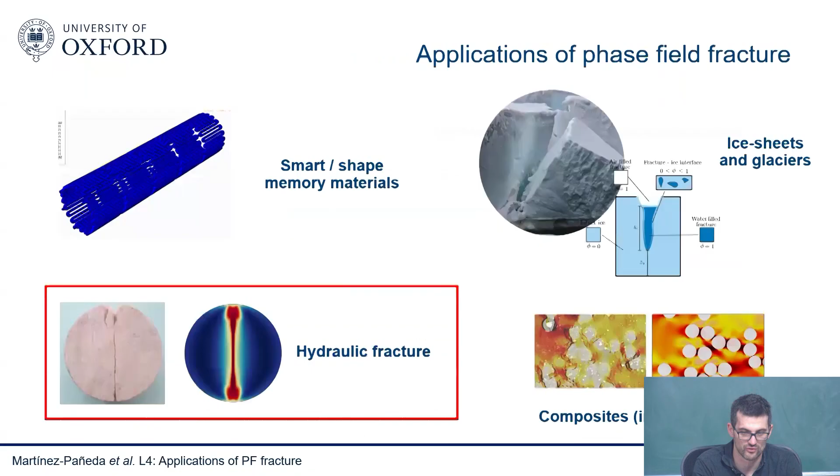We'll discuss some hydrogen today as well. I will expand a bit more on some of the things that we discussed yesterday, and we'll also discuss a little bit fatigue as well. But before that, let me take it where we left it and go back to those carbon nanotube composites. So this was yesterday, and we didn't finish. We left it just about here. So we saw the fiber reinforced composites, and finally carbon nanotube composites. So this is the last item of application of phase field to composites.

The motivation for us, at least, I mean, there's a lot of people working on carbon nanotube composites. These are sort of smart materials. Carbon nanotubes have some interesting properties. The motivation for us was to use them as sensors. So this was more a civil engineering type of application. So the idea is to either embed those carbon nanotubes into concrete or create some composites that will act as some sort of smart skins. So there's an idea of monitoring structures for damage.

This is often complicated and done at a global level, but often a lot of the problems that we have in structures are local, like corrosion and so on. So we want to put those skins somewhere where they tell us some sort of local damage has occurred. And the challenge from a scientific point of view is more that those nanotubes are very small, as the name suggests. They normally have a very large aspect ratio, and they're difficult to incorporate in the continuum, right? How do you handle those tiny nanometer tubes at the continuum level?

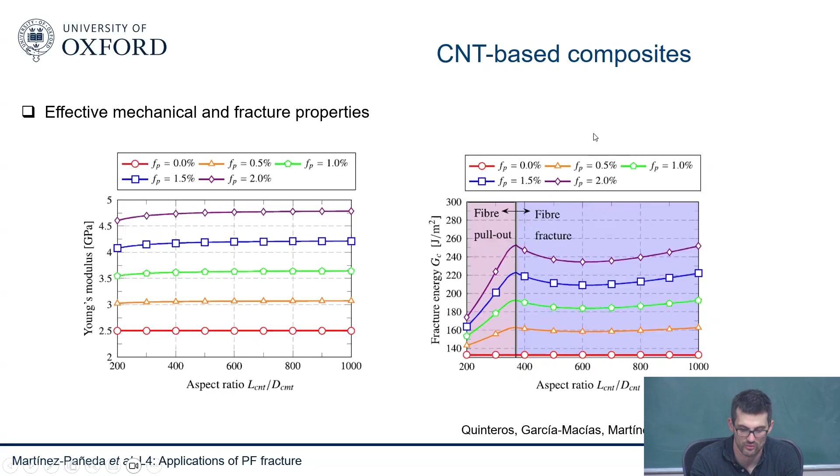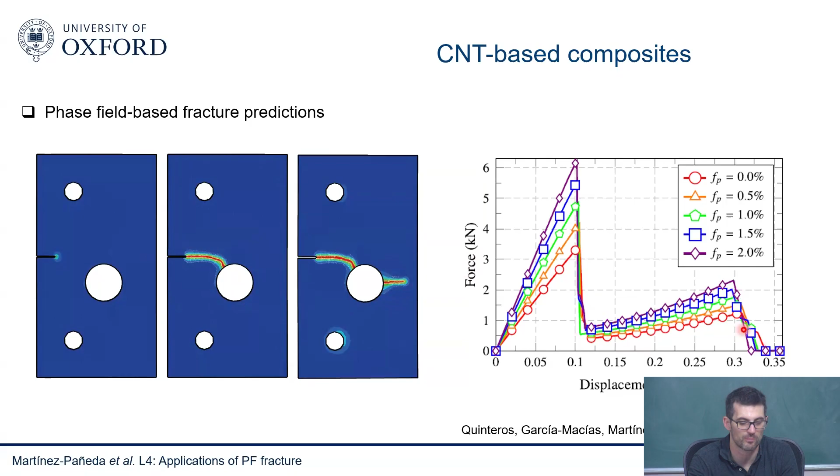So then you see cracking initiating here. Again, the phase field can predict the nucleation of cracks. So we can see a new crack nucleating here, and then eventually the complete failure of the component. And you can see that the whole package can be captured without convergence issues.

But of course, as I said, what we were motivated on was capturing this sort of multi-physics, smart material type of behavior. So we wanted to develop a piezoresistive electromechanical model. Here we need to account for both the degradation of the stiffness and electrical conductivity. And this is something that we discussed the other day.

So I think actually there was a question about if you need to come up with your own degradation function, what you need to do. So this is the degradation function, normally called G, that we use for the phase field. So normally we use this quadratic form. Every degradation function has to be equal to 0 when the phase field is equal to 1. It has to be equal to 1 when the phase field is equal to 0, and then the derivative has to be negative when the phase field is between 0 and 1.

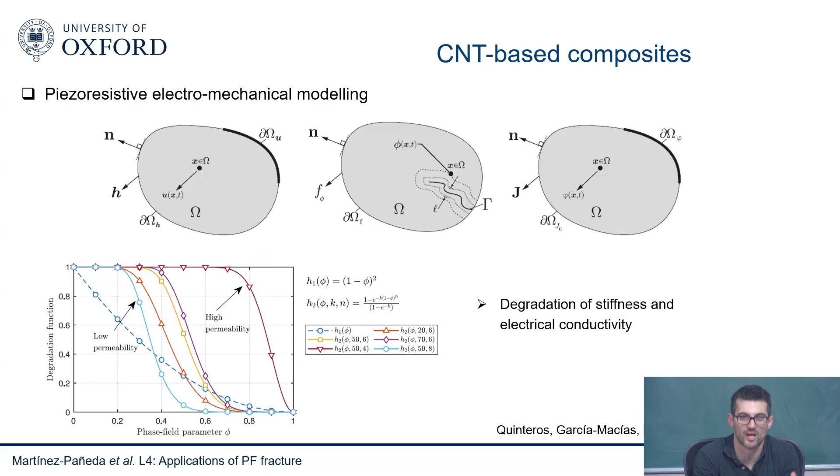So basically there's some conditions on your degradation function, but we initially decided, okay, why add extra parameters, right? We could use the same degradation function for the electrical conductivity and for the stiffness. And we saw that this was not okay in the sense that we were not able to reproduce the experiments. So this is the H1 here. We needed to do a much more abrupt reduction in electrical conductivity in order to capture the experiments. It's difficult to know exactly from first principles what's happening physically, but in order to fit the experiments we had to do that.

And you can see some examples here. This is a piezoresistive electromechanical modeling. So again, we're solving for an electric field in addition to the deformation and the phase field. And I'm not telling a lot of details about that now because I'm going to have a dedicated lecture on multiphysics phase field modeling. But the idea, you have a uniaxial tension test where you apply an electric potential.

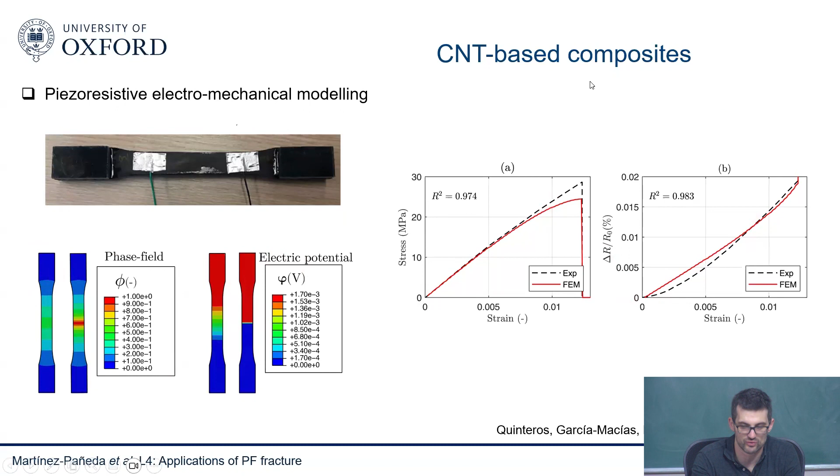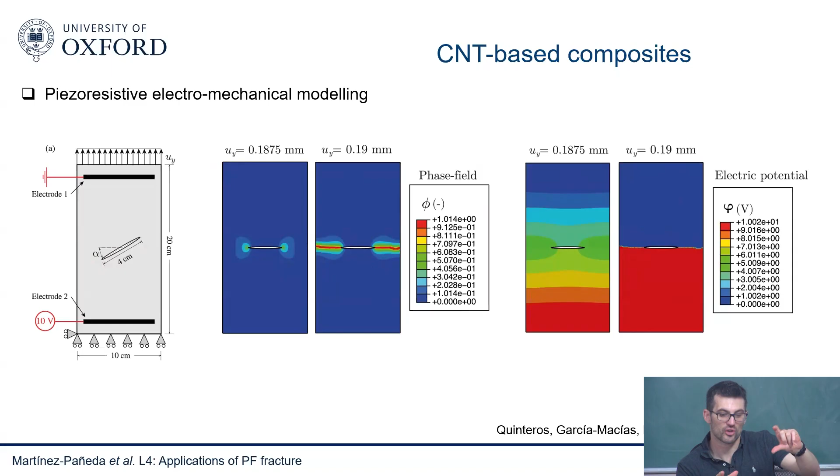Then we also tried other boundary value problems. So this is a plate with a crack that we rotated in multiple directions and tried to see, again, the same trends, right? Basically, when you have a crack, you lose completely this conductivity. There's a discontinuity in the electric potential. And this is what we wanted to see because our idea was to use this kind of piezoresistive smart skins that will tell us when a crack has grown by changes in this electric potential. This is what the engineer will measure.

And we can also do it in 2D, 3D. So this was a 3D example where you have multiple defects to start with. So it reminds me a little bit of the pipeline that we saw yesterday. So some defects to start with, you have an applied potential here, and you see how the electrical conductivity goes.

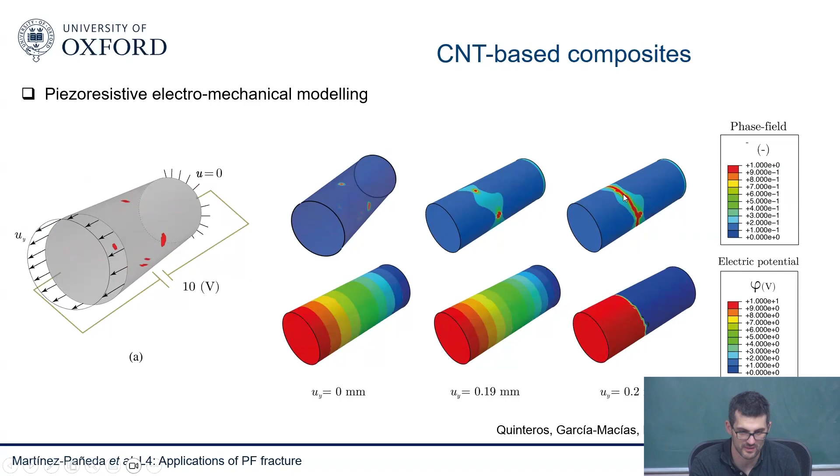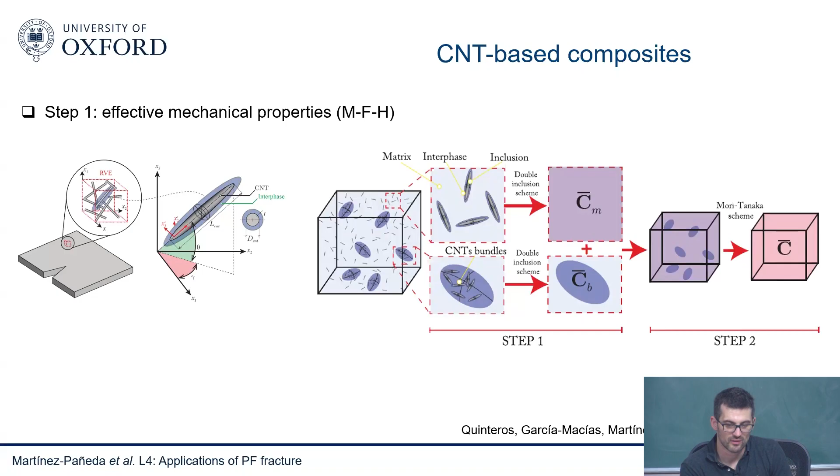But then eventually those defects merge with each other, and then you see the discontinuity in electric potential. That's basically the idea. This is something that is very much ongoing work, but this is the last part of the carbon nanotubes. So here what we did is a two-step process where first we do some mean field homogenization, and then based on the carbon nanotube dimensions, so the aspect ratio and their orientation and their volume fraction, we determine what are the elastic properties and the fracture properties. So it's a pre-processing step.

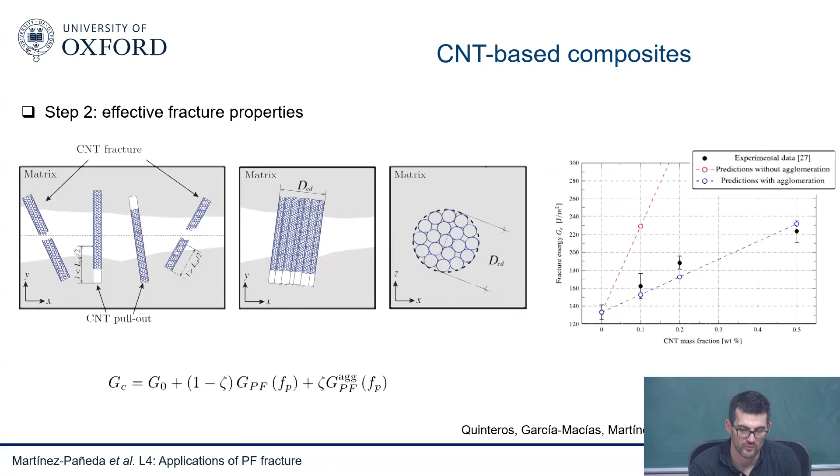Then with this homogenized model in the continuum, we run our finite elements with the phase field fracture and with electrical field on occasion. The idea was now, okay, is this mean field homogenization model perfect? It does work okay, but we can see that for certain conditions we're not able to capture what we see in the experiments. So we were hoping to do a model where we have an RVE, where we actually resolve those carbon nanotubes. So basically try to enrich that mean field homogenization scheme.

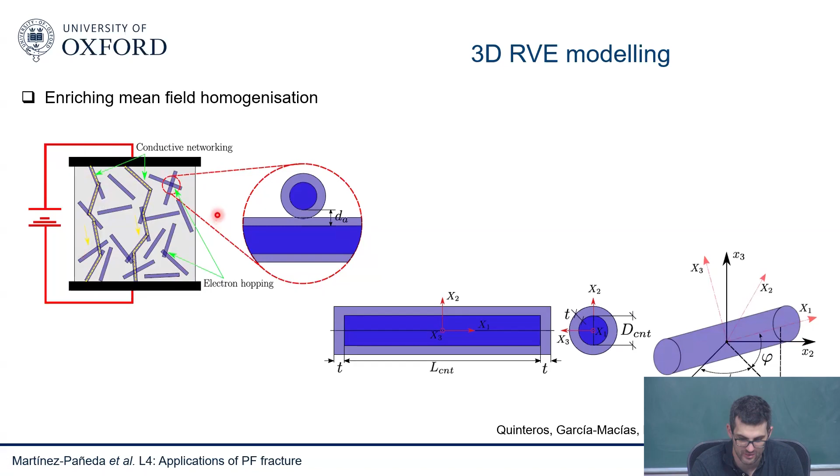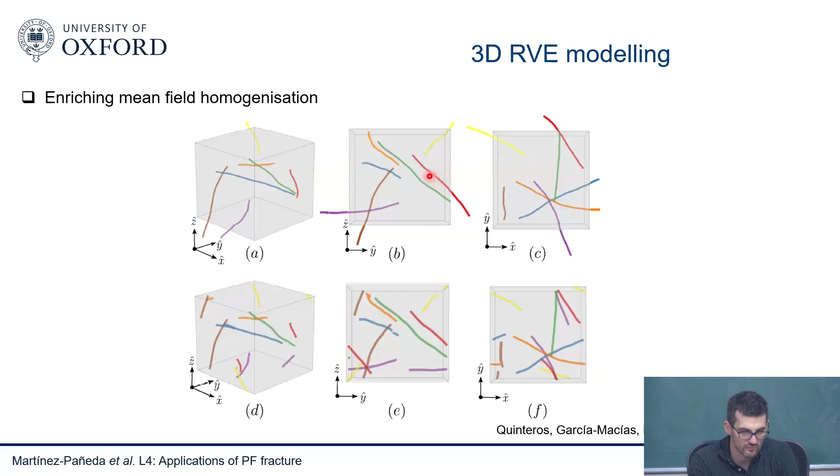So for that we have the carbon nanotubes in there. We wanted to account for two mechanisms. One is electron hopping, and whenever you put them together, this conductive networking mechanism. So I'm not going to spend too much time on this, but there are various ways that you can introduce those carbon nanotubes. You can see this is all periodic boundary conditions, the carbon nanotube that appears here then appears on the other side, and so on. So it's an RVE with multiple of those carbon nanotubes, and Leonel, the student, has done quite a lot of work in coming up with a scheme that can do this rigorously.

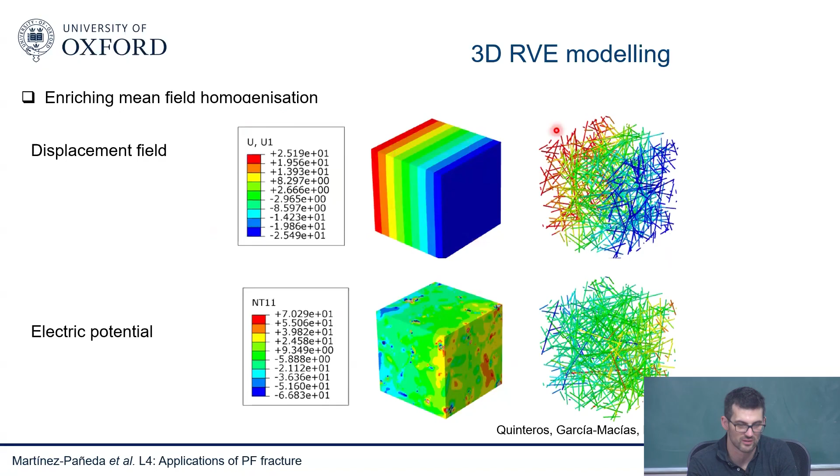You can see how they look like in Abaqus. So these are bar elements, if I remember well, embedded into your continuum solid RVE. You can see how they look like in the RVE. This is the displacement field. This is the electric potential. Again, running coupled models. Then this allows you to first make sure that the size of the RVE is rigorous. So we check the electrical conductivity and we refine the RVE to make sure that you are getting some sort of convergence. This is also electrical conductivity with carbon nanotube refinement.

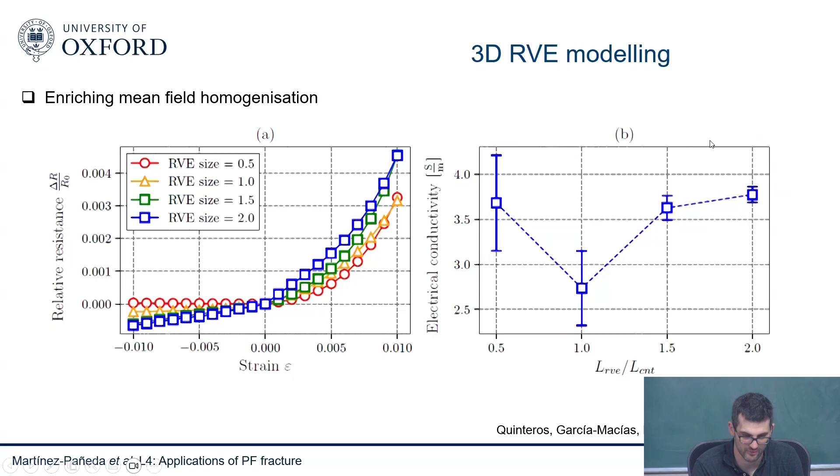Then we get the variation in electroresistance with strain, and again we keep refining until we see a converged solution. And the same for the RVE and for the carbon nanotube. So we just need to make sure that the RVE is big enough, basically. And eventually you get the same here. So this is the length of the RVE versus the length of the carbon nanotube. There's a lot of scatter at the beginning, but eventually you converge to something. I think that's the idea. So these are heavy calculations. But this is the most interesting thing.